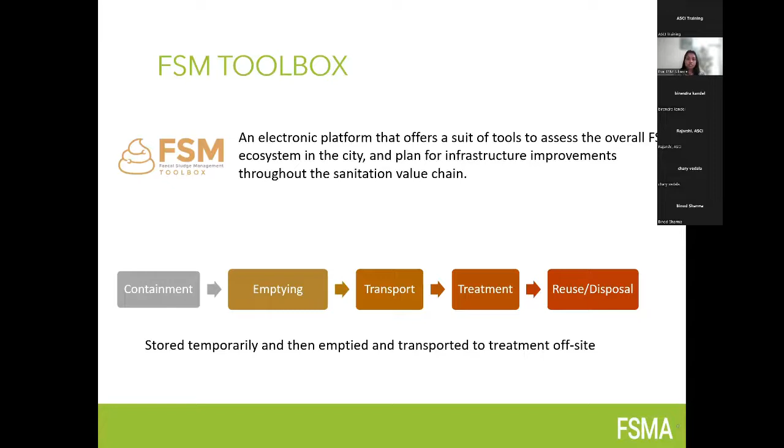So it has aspects that affect the whole of the sanitation value chain. I'm sure you already have heard a lot about the sanitation value chain, and we'll be hearing more about that today.

So here we have both the fecal sludge, where after the toilet the sludge is stored before it's transported and treated, whereas in the conventional method the wastewater and the sludge is directly transported. So that's the difference in the value chain.

You see both of them when you map out for a city or a locality. For example, the SFD, the sludge flow diagram, we'll see it later on. So I'm just highlighting what the value chain would look like.

Okay, so just showing you a few pictures to identify, because visual is better, what is fecal sludge and what is wastewater sludge. This is clearly fecal sludge because it's small, it's contained, it's not a larger area for a larger population. It's for a single household in this case.

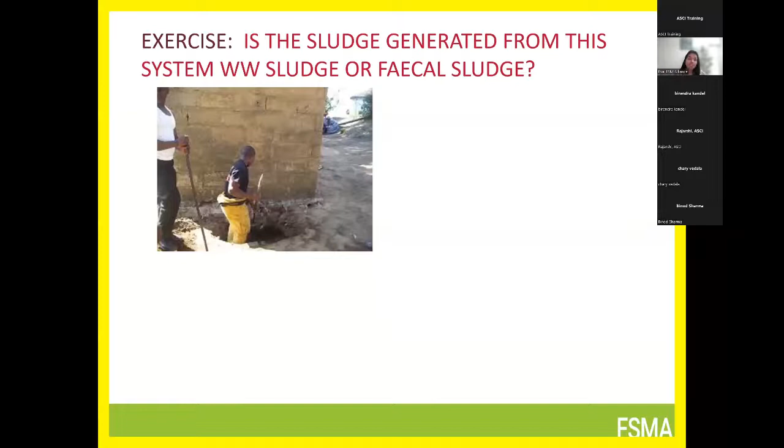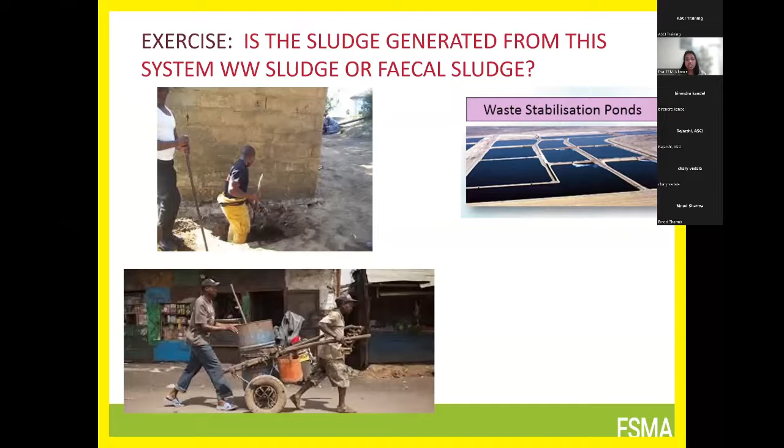Okay, so I'll just play a video that introduces this toolbox.

Citywide inclusive sanitation, CWIS, means that everybody benefits from adequate sanitation service delivery outcomes. Human waste is safely managed along the whole sanitation service chain. Effective resource recovery and reuse are considered. A diversity of technical solutions is embraced for adaptive, mixed and incremental approaches, and on-site and sewerage solutions are combined in either centralized or decentralized systems to better respond to the realities found in developing country cities.

Fecal sludge management, FSM, which is the collection, transport, and treatment of fecal sludge from pit latrines, septic tanks, or other on-site sanitation systems, is one essential component of citywide inclusive sanitation. The FSM Toolbox offers a suite of tools, guidelines, case studies, videos, and other resources to assist practitioners and policymakers to assess their performance on managing fecal sludge and formulate strategies for infrastructure improvements, institutional reforms, and financial mobilization for sustainable and effective FSM. The FSM Toolbox has two main product features.

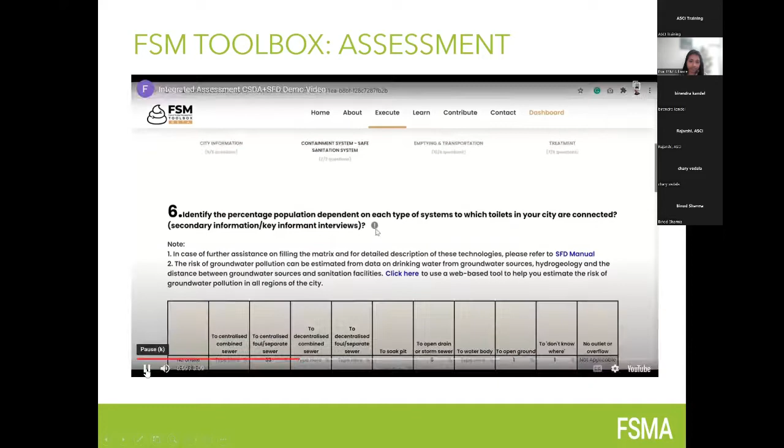I'm not sure about how to collect data for these indicators. Click on the information icon next to each question. This will give you a hint on how best to estimate or source the data. Once you finish entering all information for generating the SFD, the tool then takes you to the CSDA module.

While the shit flow diagram depicts the flows of fecal waste in the city, the service delivery assessment helps investigate the underlying policy, institutional, and regulatory environment to help explain the context within which the material flows of fecal waste occur.

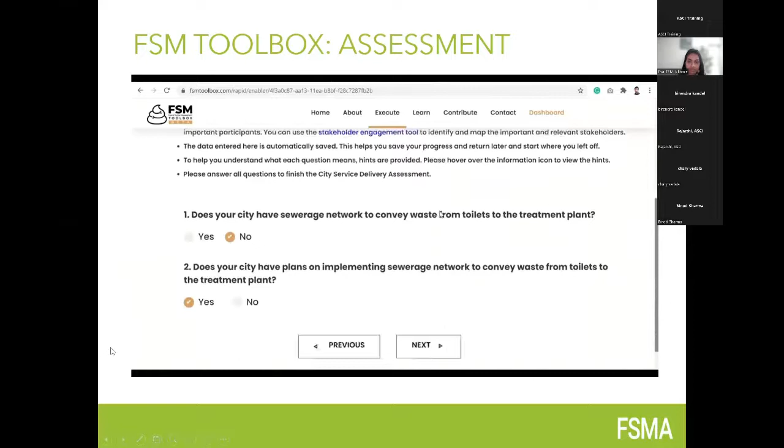Based on the city context, you can customize the tool to enter data for either sewer sanitation or non-sewer sanitation, or both. You can toggle between the tabs to enter data for sewer and non-sewer sanitation components.

This section focuses on assessing the quality of the overall ecosystem, including financial health, regulatory and institutional arrangements, and equity. You can also choose to edit the questions and options, customize and adapt them to your local conditions. Please refer to the guidelines provided for each question to understand the intent and purpose of the indicator. This will help you customize the question.

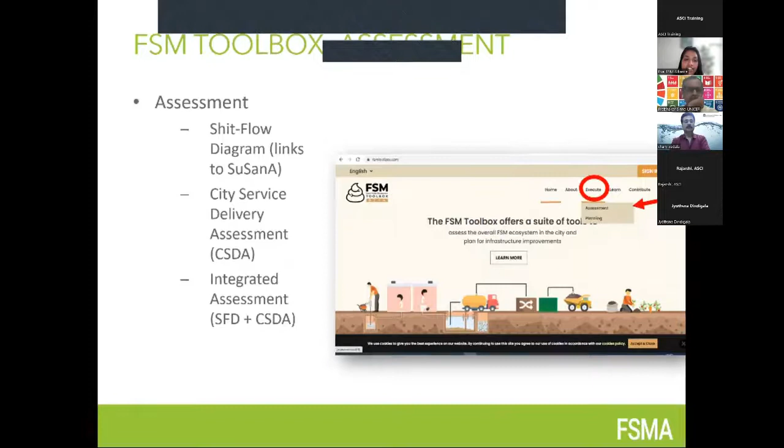Okay, thanks. So we have the shit flow diagram that is both embedded within the toolbox, and also you can directly go to the SuSanA link. Then there's the City Service Delivery Assessment, that is the CSDA, and then the integrated assessment, where you can do within the toolbox itself both SFD and CSDA together.

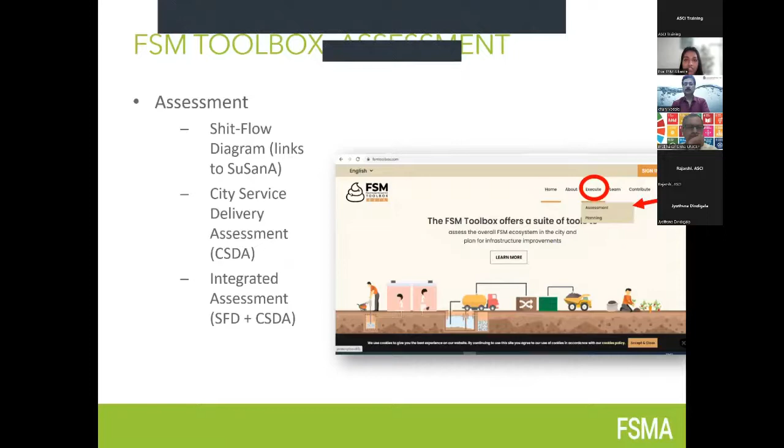So let's just see how you access it. When you go under the execute function, assessment, SFD redirects you to sfd.susana.org, which is the site for the SFD, the shit flow diagram.

And once you generate the shit flow diagram for a city, this is what you will be taken to. I'll just go through how to generate it, followed by understanding of how you read the SFD.

So what data you would need is the population, in terms of percentage of population, the different types of containment systems that are there, that is either on-site or off-site, and then how it is discharged along and to the next link in the value chain.

So you start with 100% of the fecal sludge that is generated, or the fecal waste generated in a given area, and how it is taken through the sanitation value chain. So that's how you do it.

And the second method you access it is, like I said, execute shit flow diagram directly within the FSM toolbox, or in the integrated assessment, where you do both the SFD and the CSDA.

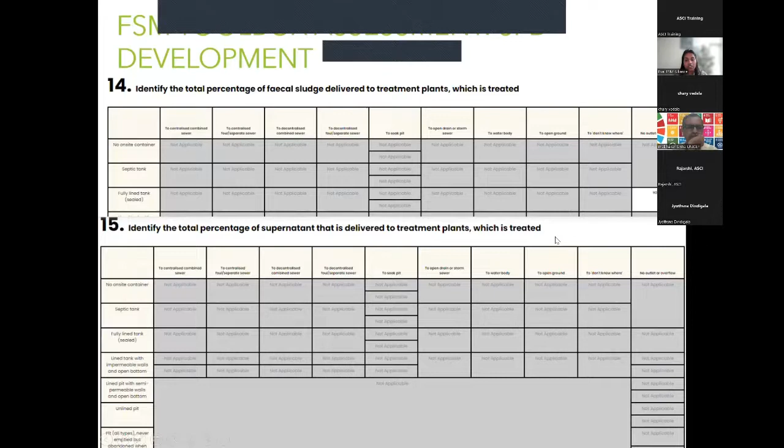And then the total percentage of supernatant, if it is delivered, is also treated under the wastewater part of the treatment plant. Here, they have identified for the Western Cape area the percentage of wastewater delivered to the treatment plant and treated, and what the total number is.

This is for the overall part of the treatment plant for that given area, not treatment plants specifically. And what percentage of the wastewater delivered to those treatment plants is treated. If there's any overflow, if it's overcapacity and some of it is not completely treated, that is captured here in terms of percentage.

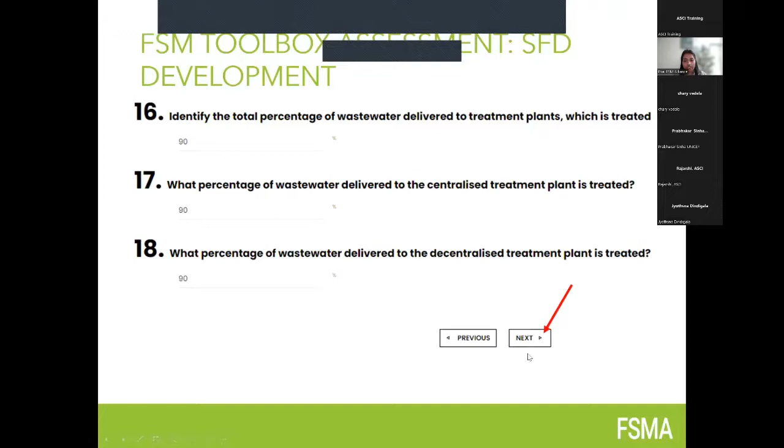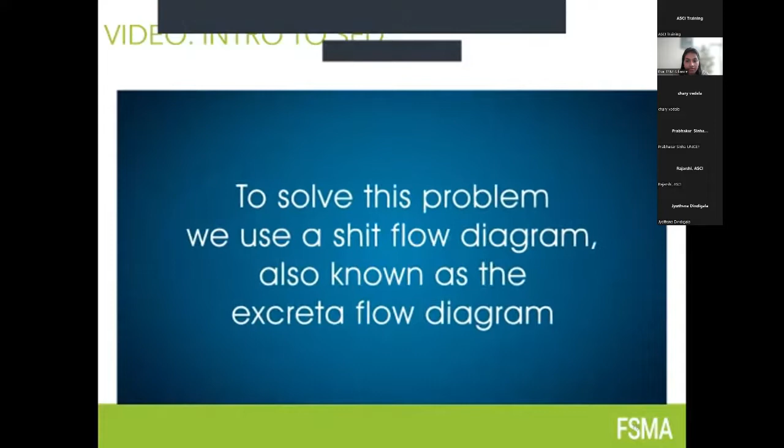How do we figure out where our shit goes? To solve this problem, we use a shit flow diagram, also known as the excreta flow diagram. The shit flow diagram, or SFD, is a powerful mapping tool for city planners, engineers, and consultants. It instantly communicates where the excreta of a city goes after it leaves its source. A single graphic at a glance tells how the excreta travels from the points of generation to the sites of disposal.

I think it has to do with recognizing where the problem is. If the problem is that people don't have enough latrines, then an approach focused on building latrines might solve it. But as we've seen, that tends not to be the case - the problem is after the toilet. What happens to the sludge? Is it contained? Is it emptied? Do the emptiers take it to the treatment plant? The shit flow diagram allows you to see what parts of this chain are dysfunctional, and therefore helps with designing interventions aimed at those particular breakdowns in the fecal sludge management chain.

The top row of the graphic is the sanitation service chain. Containment has three broad categories: off-site sanitation, on-site sanitation, and open defecation. Each category is represented by boxes of different width, representing the percentage of population dependent on that particular category. This sounds simple, right? The SFD graphic is read from left to right. The width of each arrow represents the percentage of population dependent on that particular system.

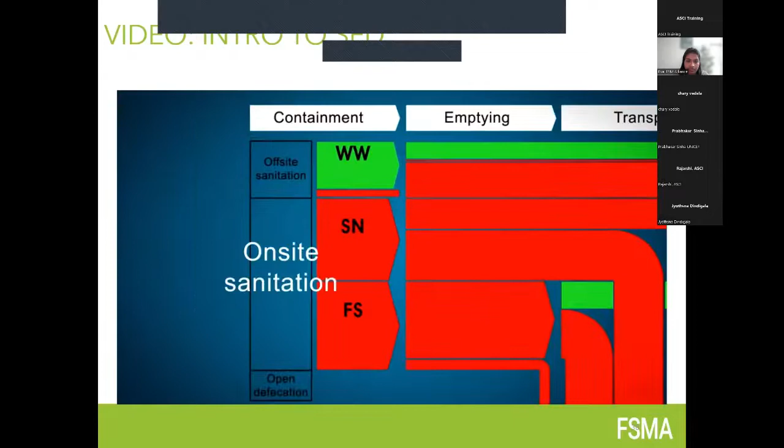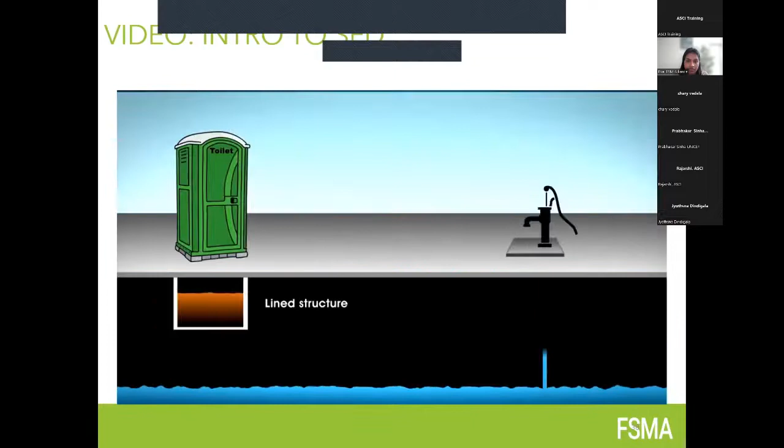The wastewater arrow originates from the off-site sanitation system, while the arrows representing fecal sludge and supernatant originate from the on-site sanitation system. The arrows are marked either in red or green depending on how the excreta is managed at each stage of the sanitation chain. Green means safe, whereas red means unsafe. If pathogen transmission to the general public is limited by the system, it is considered a contained system and shown as green. Otherwise, red is used. The green arrows tend to go towards the right, whereas the red arrows generally drop down.

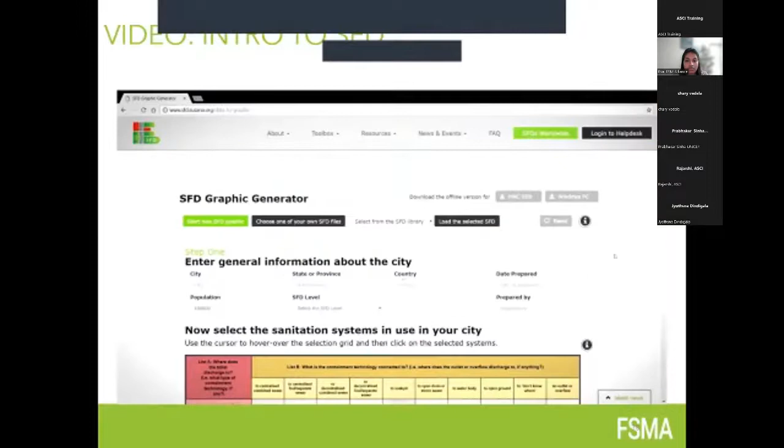Groundwater pollution is an important factor which determines whether a system is contained or not. Whether a particular system is polluting the groundwater is a site-specific question. For example, in Bikaner, an unlined pit would be considered a contained system, as the groundwater table is very low. To determine the risk of groundwater pollution, there is a separate tab available on the graphic generator where, by answering questions like groundwater table, type of soil, and extent of extraction of water, one would get to know whether the risk is significant or not.

Let's take the SFD of Cuttack as an example. Here, one can see that the wastewater generated by 19% of its population is contained as they are connected to a sewerage network, and hence that arrow is marked as green.

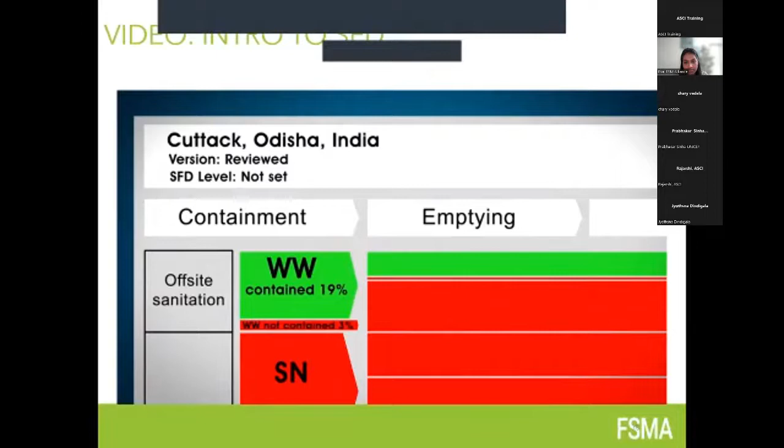The arrow in red is for the 3% of population's wastewater which is not contained, as it flows into open drains. Similarly, both the arrows of supernatant and fecal sludge are red, as septic tanks connected to open drains are considered a not contained system. There is also a red arrow for the 11% of population that defecates in the open, which is also considered not contained.

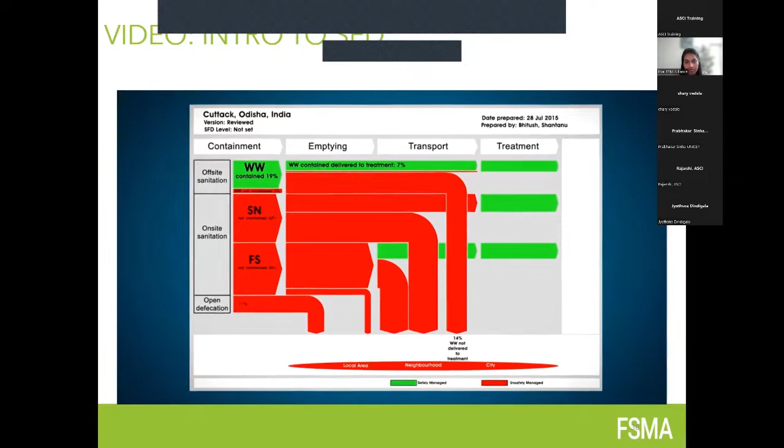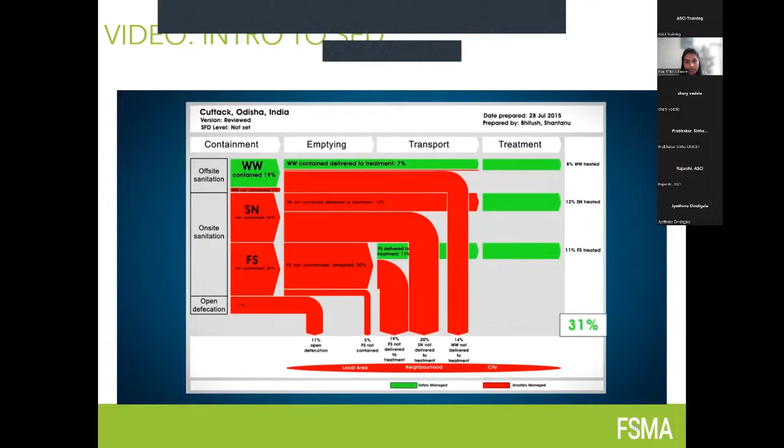The green arrows under the emptying and transportation segments indicate that wastewater from 7% of population is safely transported and delivered to treatment plants, but wastewater from 14% of population is not treated and drops down as a red arrow. The arrows for supernatant and fecal sludge follow a similar pattern—if delivered to treatment plants, the arrow turns green, otherwise it drops down as red. So in total, the excreta of 31% of population is safely managed, while the excreta of 69% of population is not.

The shit flow diagram has two components: one is the graphic, and the other is the report. The graphic should be read with the report because the report has the quality of service being delivered across the sanitation chain. If you want to understand the excreta management of the city, the graphic should be read with the report. The report also gives us the source of data, the stakeholders involved, and the assumptions made to create the graphic. So how do we make this shit flow diagram?

The process of developing an SFD starts by getting a broad understanding of the city and assessing the sanitation scenario in that location. This is done through collection of required data on population and sanitation systems in the city from secondary data sources. The secondary data includes literature review of published, unpublished, and government documents pertaining to sanitation, such as census reports, detailed project reports, city sanitation plans, master plans, and many more.

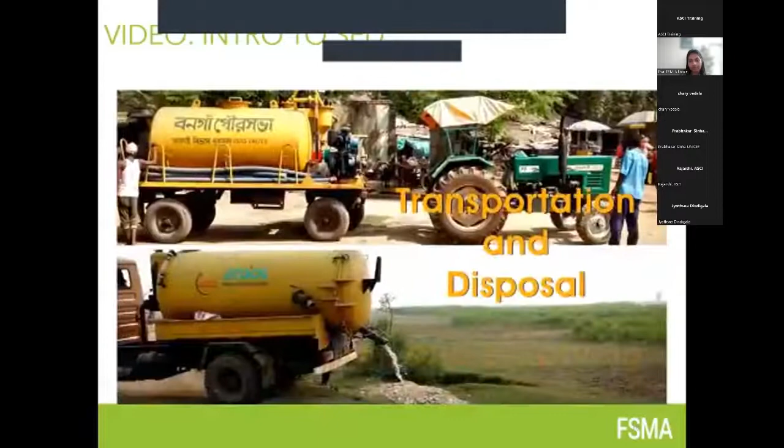So what should be the next step? To identify the stakeholders from whom the required data can be collected. A well-defined strategy should be developed to engage with the identified stakeholders. This strategy may include field observations of the prevalent systems and services, feedback from informants, measurement of the efficiency of treatment systems, and focus group discussions with the stakeholders involved.

This quantitative data is then fed into the SFD graphic generator. The SFD graphic generator produces an SFD graphic which depicts the management of excreta at each of the 4 stages of the service delivery chain.

I think this has helped a lot when we were trained on this particular tool by Center for Science and Environment. We learned how, just by inputting data, this shit flow diagram can be generated. This particular infographic has been very effective, and I think this should continue.

So how to use an SFD graphic generator? Let us go through the official website www.sfd.susana.org to understand how to generate an SFD using the SFD tool. Click on the toolbox option and select SFD graphic generator. Now click on Start New SFD Graphic.

Let us go one step at a time. Step 1: Enter the general information about the city, such as the name of the city, state and country. Put in the date on which the graphic is prepared. Then fill in the population, the type of SFD level, and the name of the person who prepared the SFD. Now select all possible sanitation systems present in the city, and mark it in the selection grid given below.

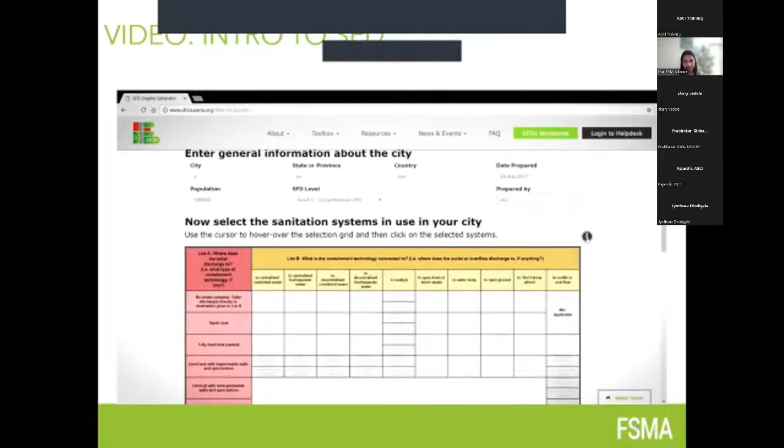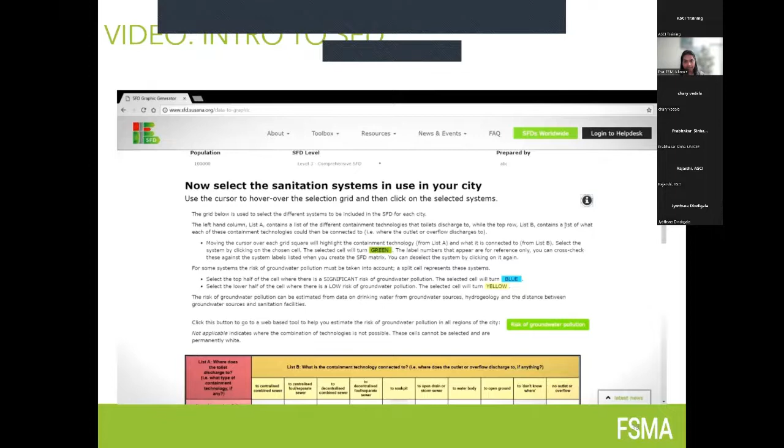To understand the parameters and details about the selection grid, click on the alphabet I in the right corner. Clicking on I opens up the instructions on how to use the selection grid. To answer the questions pertaining to groundwater pollution, one needs to click on the button called Risk of Groundwater Pollution. The left column of the selection grid describes all types of containment systems, and the consecutive columns describe what these containment systems are connected to.

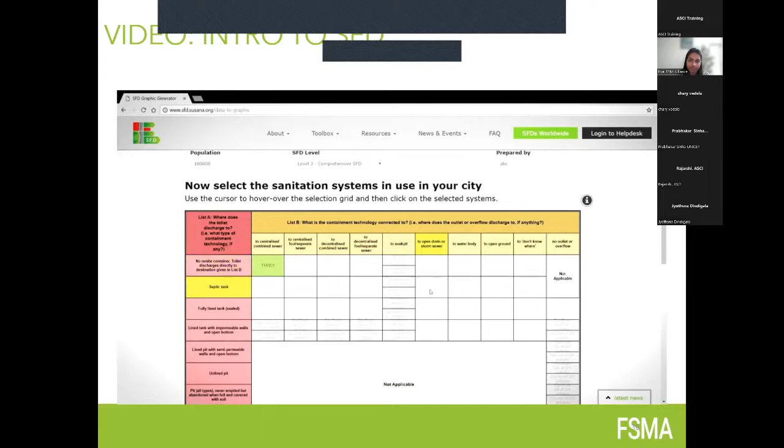Let us assume in a city X, 3 types of containment systems are present: a toilet with no on-site containment, which is connected to a centralized combined sewer; a septic tank which is connected to an open drain; and a lined pit with semi-permeable walls with an open bottom and no outlet.

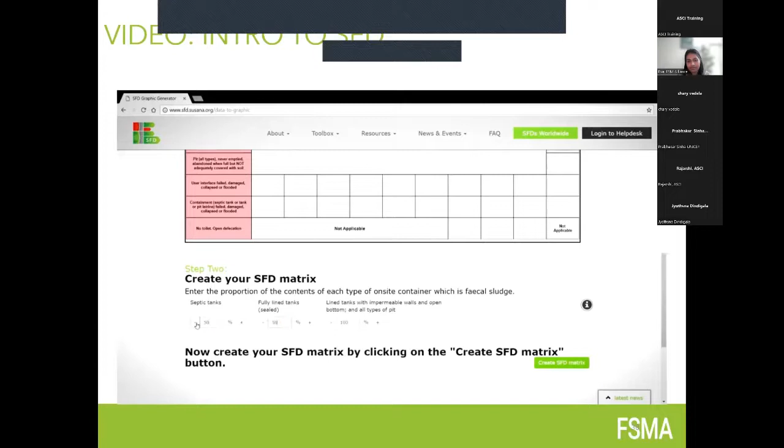To create an SFD matrix, enter the proportion of fecal sludge one can find inside each type of containment system. For further explanation on this, click on I present on the rightmost corner. Next, click on Create SFD Matrix. An SFD matrix appears.

The leftmost column consists of the selected containment systems. Each containment system is labeled by a unique variable. One should refer to the SFD glossary to understand the systems through the variables in depth. The next column indicates the proportion of population who use each of the containment systems. The consecutive columns indicate questions on the proportion of wastewater, fecal sludge, and supernatant along the service delivery chain.

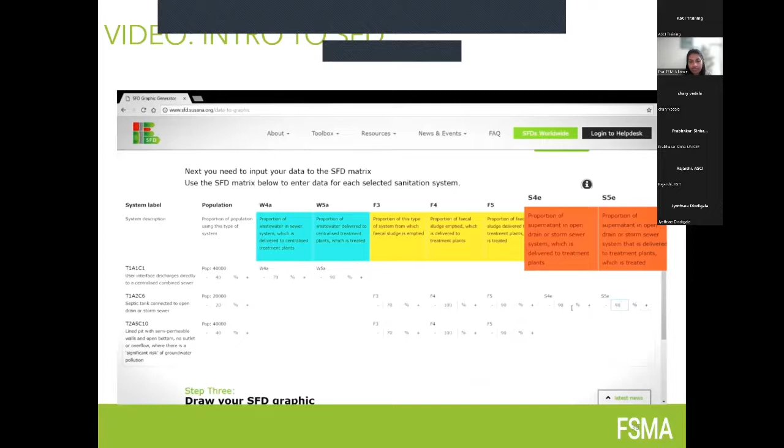Actually it is an interesting tool, but data intensive also. We didn't have so much data about the containments because, as you know, the census does not have so much detailed information on containment. It just says septic tank, pit latrine, and open defecation, that's it. So to have intensive data, we had done a baseline study, which was sample based. From that we could pull out different types of containments, filter them out, and match them to what criteria the SFD tool demands.

A city should make a shit flow diagram because it's a much more accurate representation of the problem that untreated fecal sludge causes for the environment and for health. If you look at a place like Dhaka, Bangladesh, using the traditional measure of access to sanitation, more than 98% of people have that access. But if you look at where the sludge goes, it turns out that more than 90% is not treated. That's why a representation like the shit flow diagram is more accurate.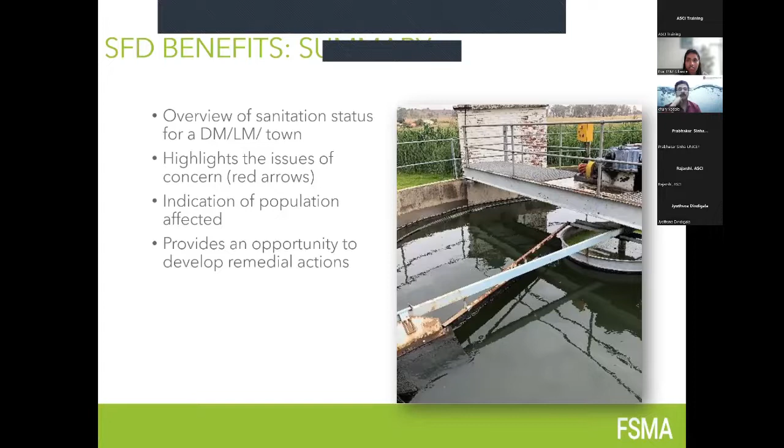So I think this was captured, I'm not going to repeat this again. It gives a detailed overview, so it's very helpful for decision makers and stakeholders to understand at a snapshot what is needed in that particular town or municipality, and it highlights the areas which need attention and indicates the percentage of population affected, and then actions could be taken after. So I'm hoping that after this you're able to read the SFD graphic. I will let this be an exercise, but later on you can go through it.

Okay, so I'm just going to briefly take any questions. There are just a couple of questions. Thank you very much for introducing the first tool. Friends,

the excreta flow diagram or SFD, shit flow diagram, is a tool to understand in a very graphical way. It's a very powerful advocacy tool to communicate to your stakeholders the extent of safe and unsafe practices prevailing in your town. At a glance, you would get what percentage of households are on the safe side and what percentage are on the unsafe side.

So even there are few questions. Question number one: in certain cities there are some communities, like even in Mumbai, quite a few households are dependent on shared sanitation facilities, that is public toilets or community toilets. If you go to Dharavi, there are a lot of community toilets, a lot of slums have a lot of community toilets, and they're ready to migrate to individual household toilets. How does that get reflected here? Is it acceptable? Will it be treated as green or will it be treated as red?

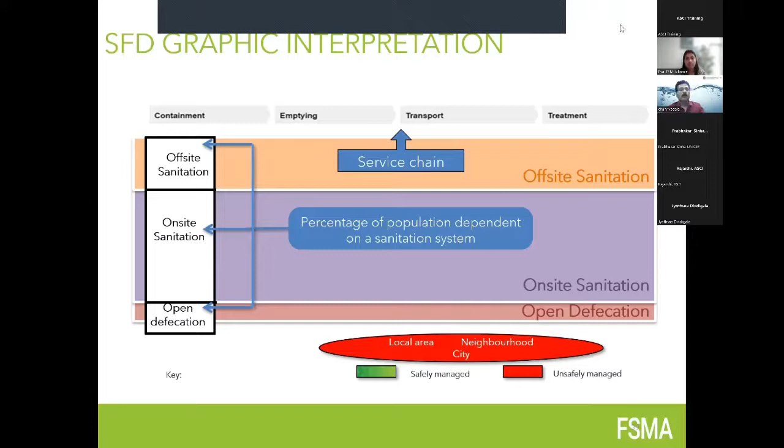So there is one more question, related to what our friend from Africa asked - what is safe and what is unsafe? If you have a septic tank and the outlet is connected to a drain, not connected to a soak pit - that's a clear case of an on-site system. How do you view this from an SFD point of view? Is it an unsafe system? If the septic tank is present, that means it's contained.

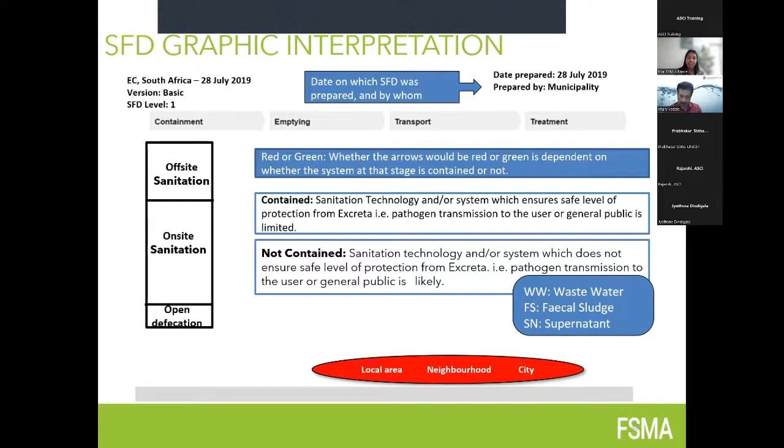But if it's connected to an open drain, then emptying and transport might be classified red. It depends - some areas connect the open drain at a later stage to a treatment plant, so whatever volume is treated from that open water connected to the treatment plant is added as a percentage treated. But generally, if it goes from containment to an open drain or nala, it would be red - unsafely managed.

It is called safely managed, or in this case unsafely managed. I think that answers some questions. There's one more issue - one of our friends asked: on-site systems conventionally deal with black water, human waste and anal washings. Now much of the gray water, which also contains some pathogens and gets cross-contaminated with overflow of septic tanks, is not captured in the containment system. So is SFD restricted to only black water and not looking at gray water? That's correct - it's a shit flow diagram, so technically it's black water, not gray water, that is looked at here.

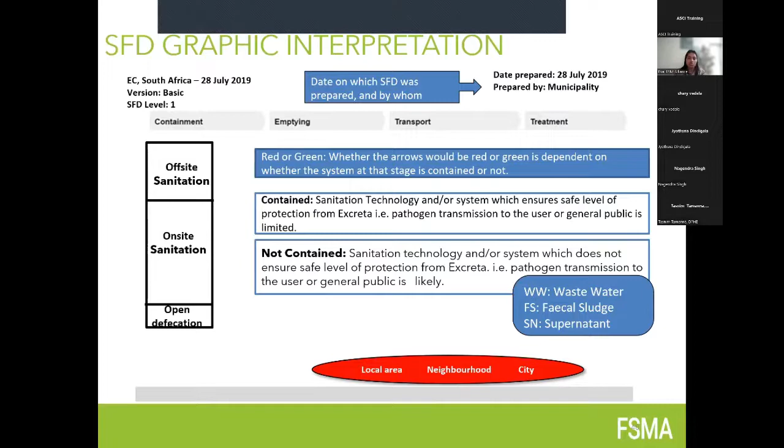Then from a chunk it goes into smaller and smaller pieces, like here for example. This is a supernatant that is not contained, and this is the fecal sludge. If part of the fecal sludge is treated, great. If the rest is let into a nala untreated, but some amount from the open drain is captured back into a water treatment system, then that percentage is called safely managed.

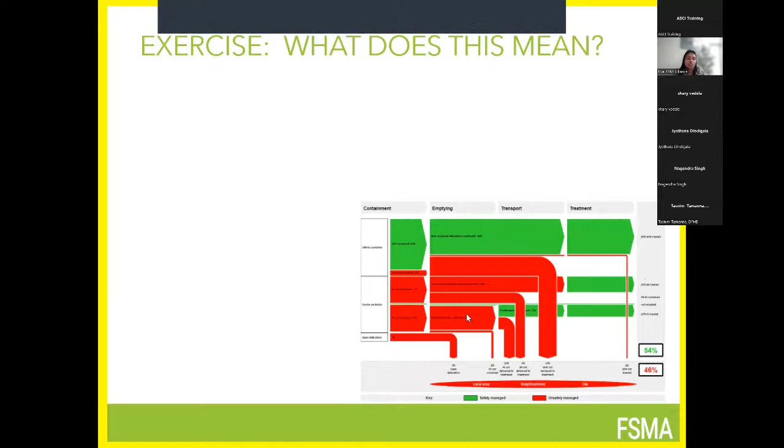So then we come to the second tool, the city service delivery assessment, or CSDA. Within the tool it falls under assessment, and you can find it both as a single component or together with the SFD. It asks why, what are the conditions in a city that led to its sanitation services being like that. It includes infrastructure, policies, legislations, laws, etc., all captured under the CSDA assessment.

Here it looks at both sewered sanitation and non-sewered sanitation. It's divided into three kinds of environment: the enabling environment, the developing environment, and the sustaining environment — things that enable the sanitation system to function, things that allow sanitation solutions to exist and be present, and how the system continues to function within the given area. Under each, there are three more pillars.

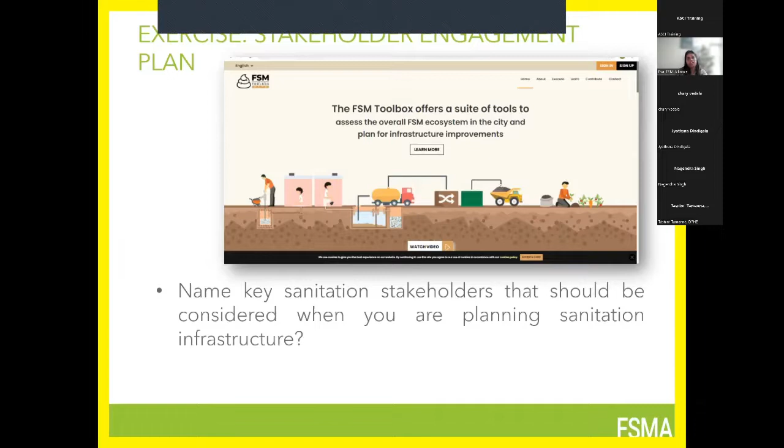Again, I'll leave the questions for your exercise later for you to do at your own time. Then we come to infrastructure planning under the planning tool set. This has two components: the city level infrastructure planning and the regional level infrastructure planning.

The Citywide Planning Tool is a powerful decision support tool designed to help you collect and analyze geospatial data to plan for infrastructure investments along the FSM value chain.

You may choose to view the questionnaire before starting the process of filling out the data by clicking on the View Questionnaire button. You may refer to this demo video at any point for guidance on how the tool works.

Once you get started, the tool prompts you to select the type of infrastructure improvements you want to undertake by clicking on the tab Planning Tools. The tool is designed to help you estimate the infrastructure gap and identify a menu of suitable responses to aspects such as household and community.

I'm just going to pause it here because it is available later, and I think I'll rather do the talking and continue so we can have more meaningful dialogue later.

This infrastructure planning helps identify and plan the intervention along the value chain that is necessary for fecal sludge management for the given area.

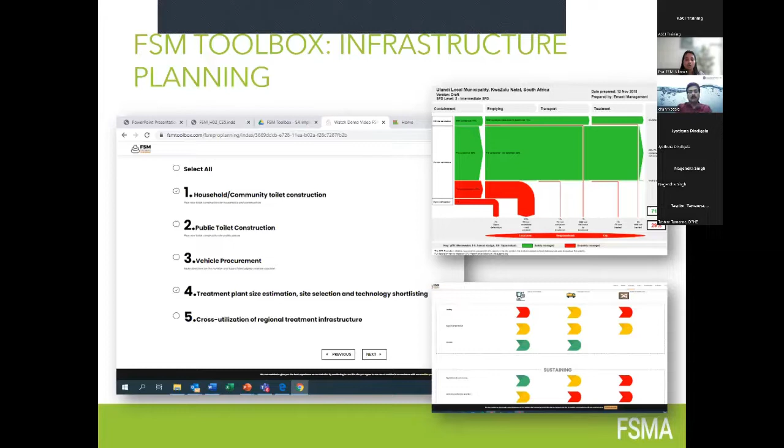The CSDA assessment also states more funding for constructing toilets and treatment systems. So that's what you have selected here: household community toilet construction and treatment plant size estimation and site selection and technology shortlisting for probable intervention in that site as well.

So what are the steps involved in developing a plan? You will first prepare the questionnaire after identifying the key areas of intervention, and then you start with the data collection, data analysis, and reporting. In the meanwhile, we also do the sample size determination and training the enumerators internally. But outside that, it's mostly questionnaire, data collection, data analysis, reporting.

The data collection is done via a mobile application, which is tracked online in real time. You can also review data from the enumerators on the mobile application in real time.

Graphically, as the engineer or planner starts his planning questionnaire, the enumerator receives a notification, agrees, and then goes and collects the survey, which is fed directly to the engineer or planner. They can then see the number of surveys completed out of the total number, and in which areas.

Like the 2 that we selected in the household, 6 were completed out of the 10, and similarly for the community toilets. You also see a graphical pie chart.

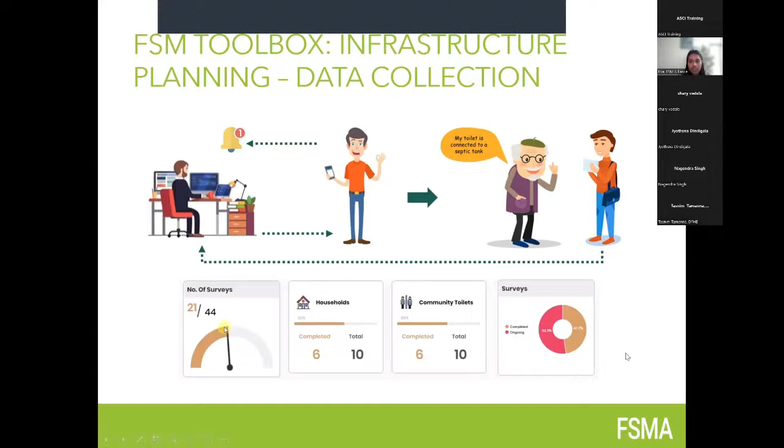This is a view of how to add a new enumerator within the system. You just need their name, email ID, and then you can see the status on the right.

So this is how the app would look, and this is how the survey would look. It's built for a smartphone, of course.

It doesn't need an internet connection while collecting the survey, so even in remote areas, the surveys could be collected. Once the enumerator or data collector is back within an internet connection area, the data will be uploaded online to the server.

So that's the tools. There are a number of assumptions that take place for the planning. For toilets, for example, the number of seats required for X number of population, X number of men.

The number of seats both for men and women in community toilets, and then number of seats for men and women also for public toilets - those are the numbers that need to be put in based on the regional guidelines or rules set up by the code within that region, area, or country specifically. That is one of the assumptions for the public toilet or household community toilet.

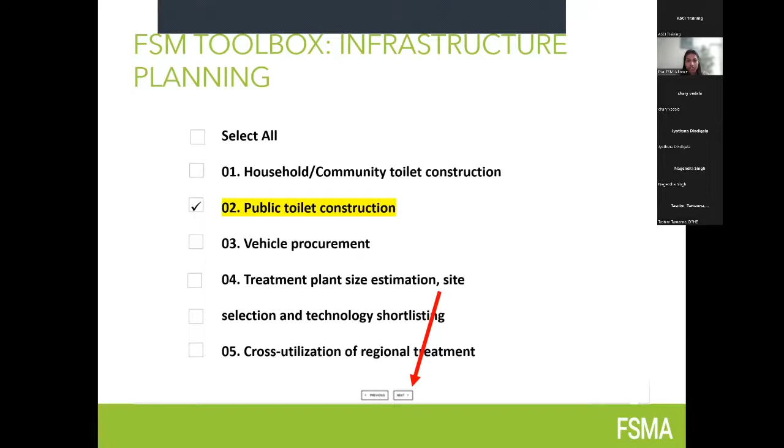Once the questionnaire is selected and the survey is launched, the data is collected, which includes the current GPS location of the current public toilets, and also location of any empty areas where a public toilet could be installed. Then the next question covers average floating population in the public area, the male-female ratio, the available public toilets, and the infrastructure details of the available public toilets.

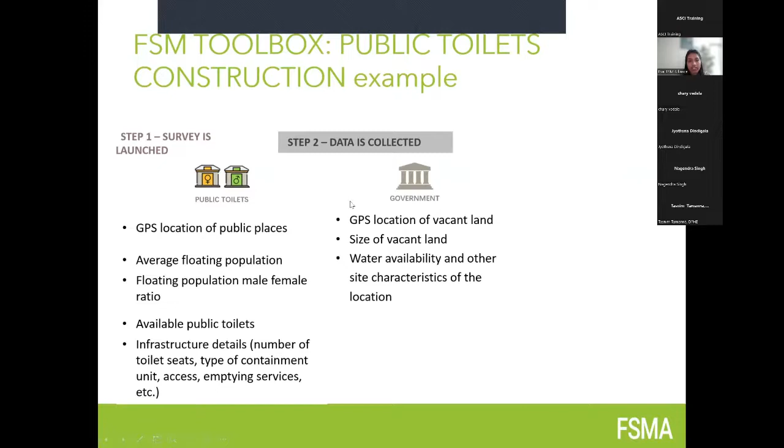So that includes the number of toilet seats, containment unit, access, emptying service, etc. Then, as I mentioned, the GPS location of vacant land is also collected, along with the size of the vacant land, water availability, and other characteristics of the site, so that it could be planned for planning purposes.

Then once these are fed in, the data is processed. The algorithm uses, for the public area, the total male to female ratio, and from the benchmark, what is the required male to female toilets for that floating population. Then the difference is used to assess if the available toilets are sufficient or if there need to be more new public toilets built for that area.

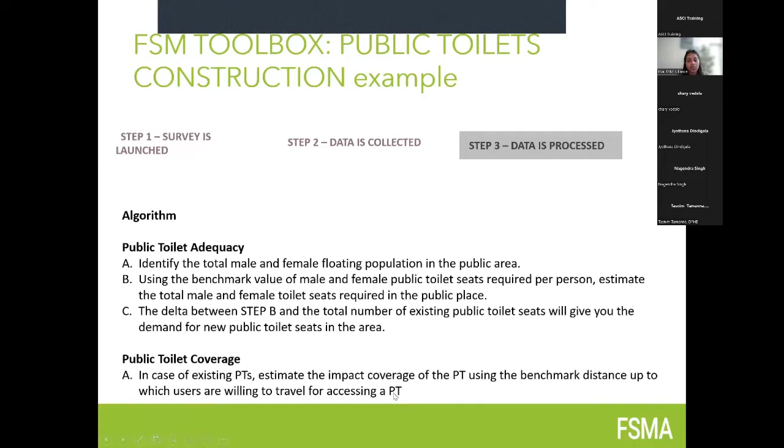So the distance that a user is willing to travel is also taken into account when doing the public toilet coverage.

So then the algorithm for construction of the new public toilet determines if there's a need for new construction, or if the current public toilet system is sufficient. For the vacant land, it determines the number of toilet systems that could be built, and the distance between where the population is concentrated and the willingness to travel is assessed to identify the exact vacant land that will be used. Once that is identified, according to the male to female ratio, the seats are allocated to meet the demand.

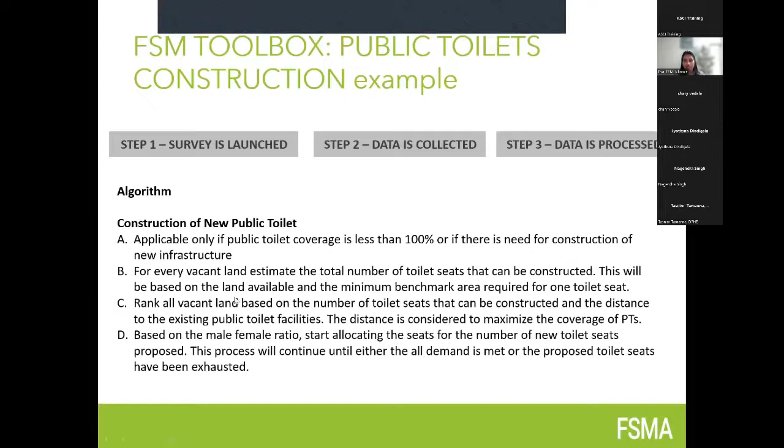So this is an example. For a floating population of 5,000, 3,000 are women that need public toilets, and 2,000 are men.

The number of public toilet seats available is 50, which, according to the assumption for 2,000 men, is sufficient. For the women, the available female public toilet seats is also 50, but according to the ratio required for the number of female floating population, there need to be 25 additional toilet seats constructed.

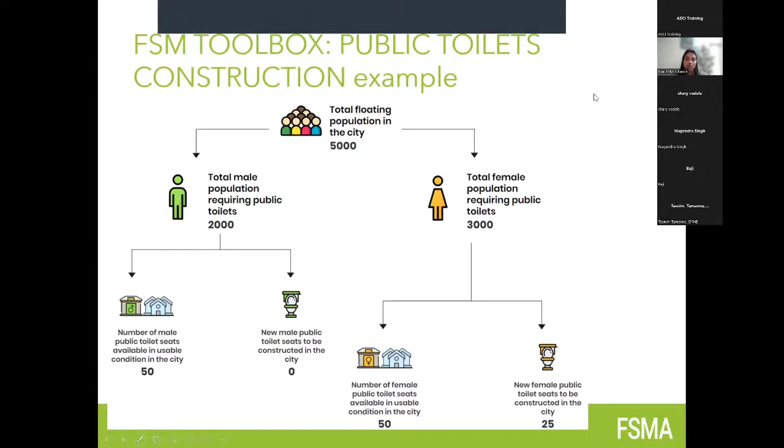So this is basically how the data you collect from the survey is used.

And this is a visualization of the area. You see for the public space here the total floating population, available toilet seats versus the required, so proposed new ones for both men and women.

And then you come to where the available ones are currently located, and you see where the empty slots are where a new one could be put up.

And then based on the willingness to travel, you choose the sites and the number of seats if it's sufficient. And if it's still not sufficient, based on the gap that is identified, you can build another one depending on the available funding.

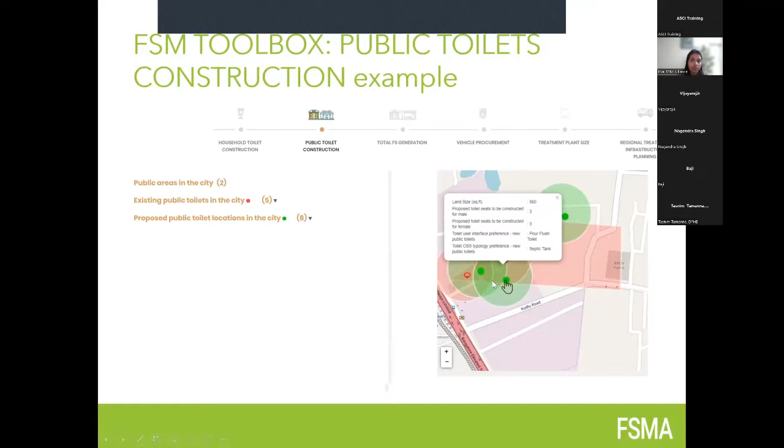Okay, so then for the household toilet construction, similarly, after the survey is launched, we get the GPS location, population of the household, access to the community toilets or the household facilities.

Availability, functionality as in the type of toilet system and the current toilet use practices, and then the on-site sanitation service system if present, land availability, preference, and water availability for the household.

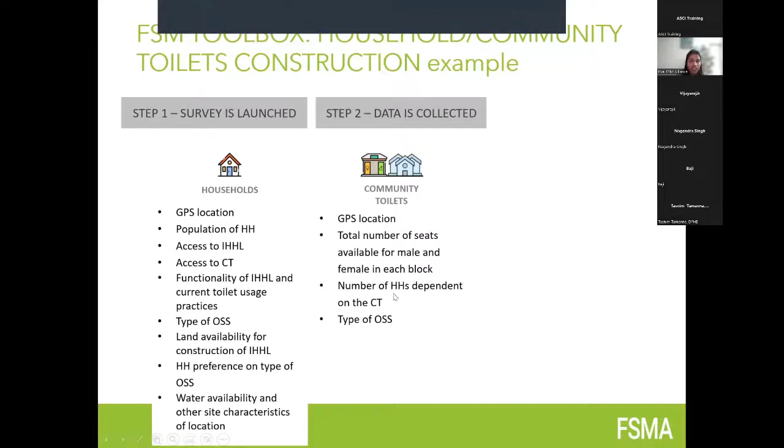And also for the community toilets, GPS location, number of seats, the number of households that are dependent, and the on-site sanitation system. The vacant land is also captured for the community toilet, including GPS, size, water availability, etc.

So similar to the public toilets, just a larger region, you get the overall view for the household community toilet construction. Then again, based on the preferences for the household, the toilet type system is installed, and the on-site treatment systems are based on what is currently possible from the accessibility, the type of geographical topography, etc. So that's recommended through this survey infrastructure planning module.

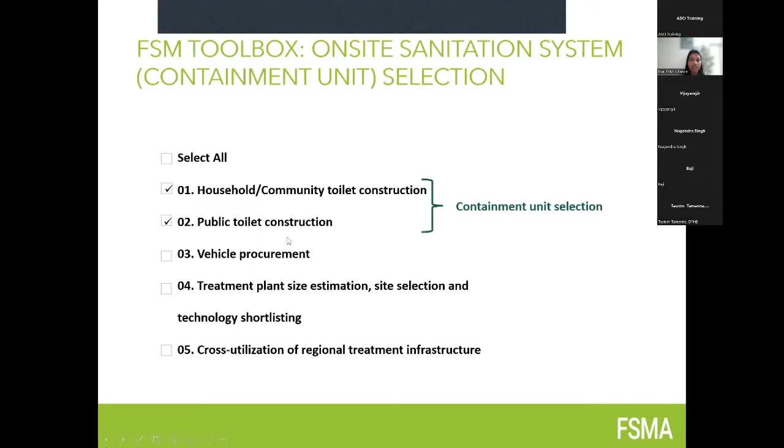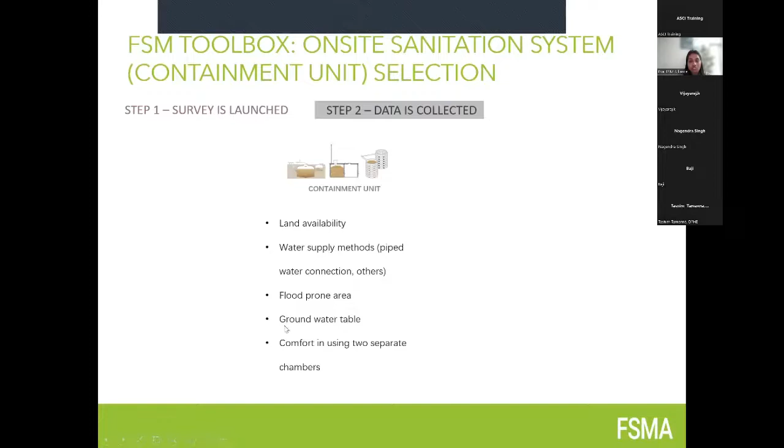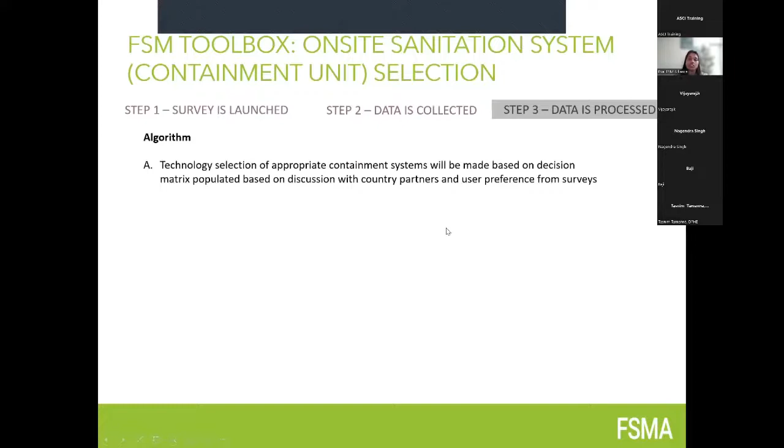So you can also select both household and public, and then you get the combined survey for containment unit selection. For the containment unit, you come with the type, land availability, flood prone area, water supply, groundwater, comfort in using the two different separate chambers, etc., by the local users. Then the data is processed based on the decision matrix, which was based on the discussion with the partners.

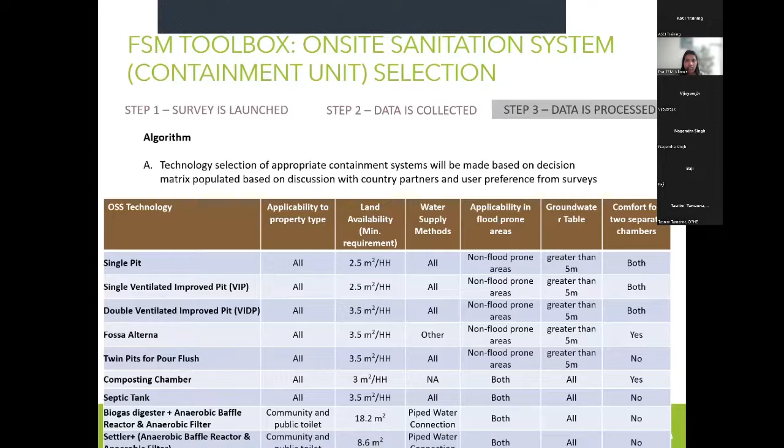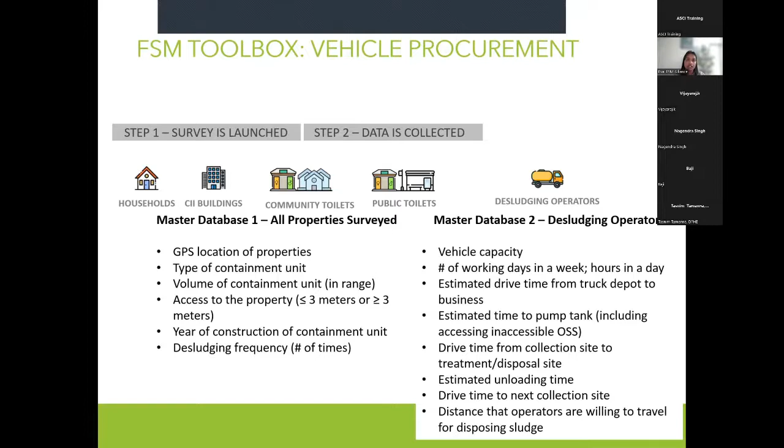It depends, from the user side, on the location, type, volume, and number and frequency in the year. From the desludging operator side, it's the capacity, willingness to travel to a treatment system, number of working days, and other points. So both sides are evaluated, the data is collected, and then some benchmark assumptions for the requirements from the city or municipality for prescribed desludging, population growth rate - all of that is also included within the algorithm.

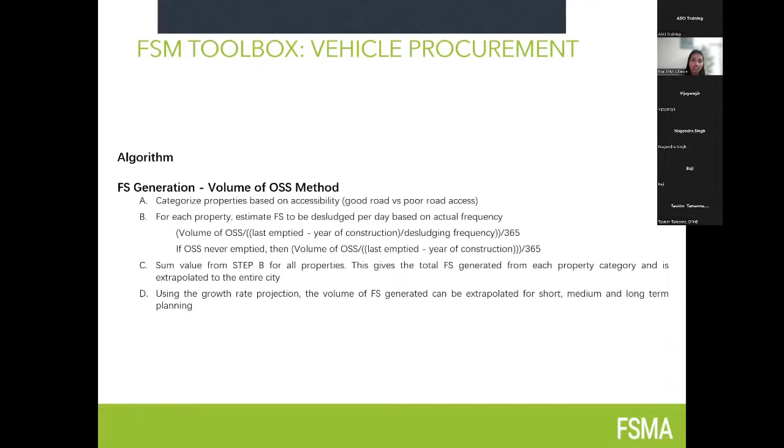Then it arrives at the volume that needs to be treated for a particular region, depending on the type of desludging interval and the capacity that region has in terms of treatment plants, and the operators' willingness to travel and the number of operators. So that is all fed in. And if there are not enough operators, then we go into the purchase of new vehicles - that's also a step we get from the output of this planning process.

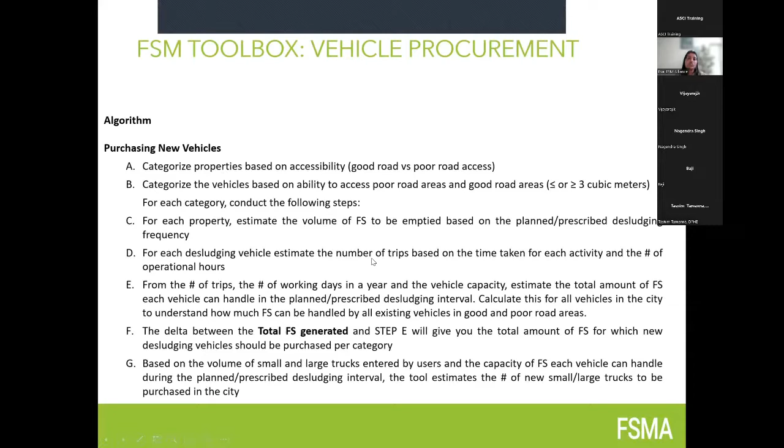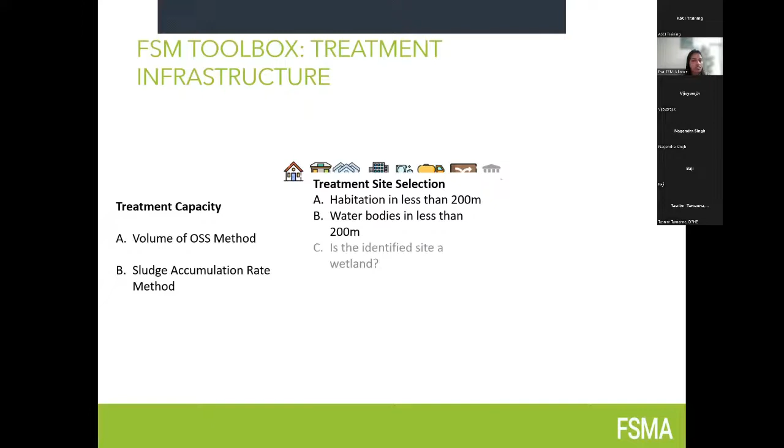So for the treatment infrastructure, based on the current treatment capacity and the sludge accumulation rate method, both of them, we start with checking if the current ones are sufficient. If not, if a new treatment selection system has to be built, there's a selection of the site based on all of these variables, and then selection of the technology based on all of these variables.

The algorithm gives the number for the capacity, the vehicle procurement that is needed to transport the said capacity from the site to the treatment plant. Then the quantification methods are all calculated based on the assumptions that you have input, and also the growth of the city that is estimated in the assumptions. So that way it arrives at a treatment capacity system that is needed for the city or region.

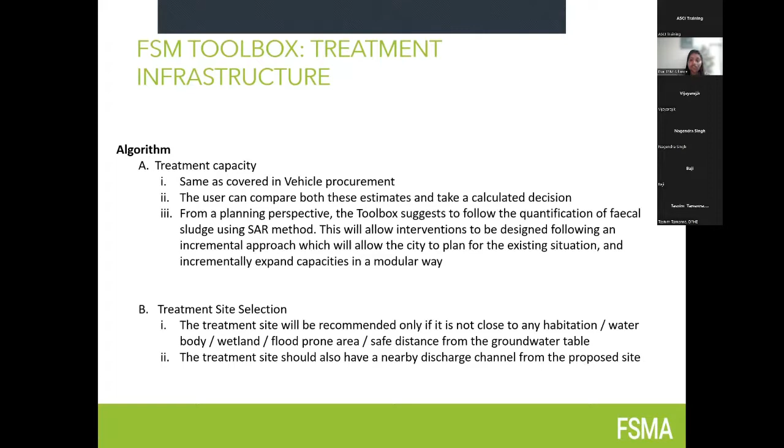And then treatment site selection, based also again from the questionnaire, we arrive at the optimum site that is not close to any habitation or water body, and then a discharge channel that also follows the regulations set by the government of that region.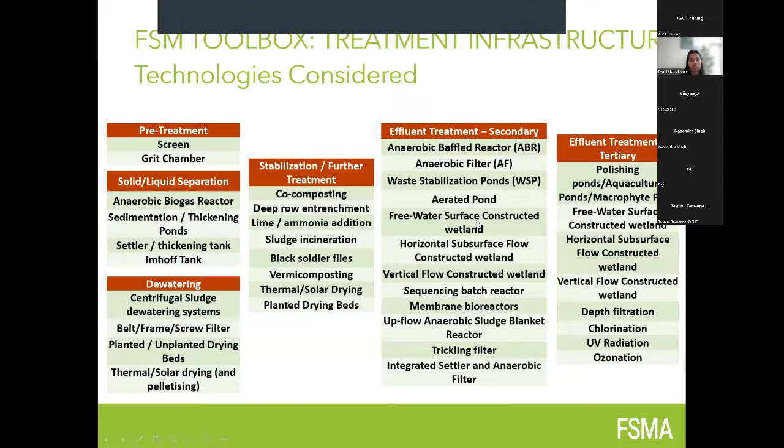So these are the different infrastructure technologies that are considered within the city planning tool, and suggested based on the survey that is done. Suggestions are given out, and also includes geographical mapping of the region, a city, and what steps need to be taken.

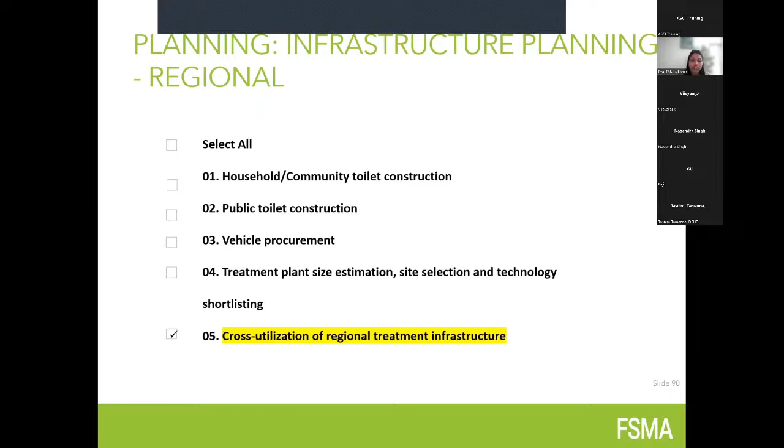Then we come to the regional planning, which is also similar to the city planning, just it includes 2 or 3 or more cities that are in a cluster in a region that can cross-utilize each other's treatment options. So it's not just dependent on a city or municipality's own treatment options, but also the close-by ones, based on which is the nearest one that a desludging operator could go to that has the capacity to take the fecal sludge. So again, you start with entering all the data.

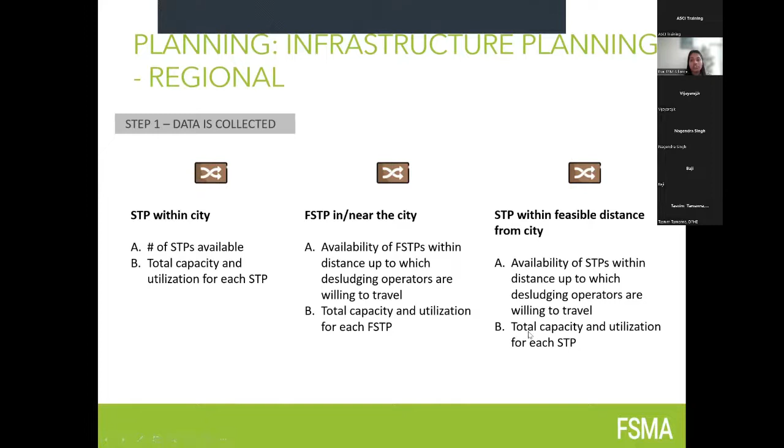The data is collected - one is the STP within the city. STPs, that is FSTP, is a fecal sludge treatment plant that is in or near the city, and then one that is feasible from the city to travel to. So this data is then used for the calculation purpose.

Depending on the treatment type, sometimes it's co-treatment, and then the amount that could go into the treatment systems differs depending on treatment technology. So all of that is also taken into consideration here.

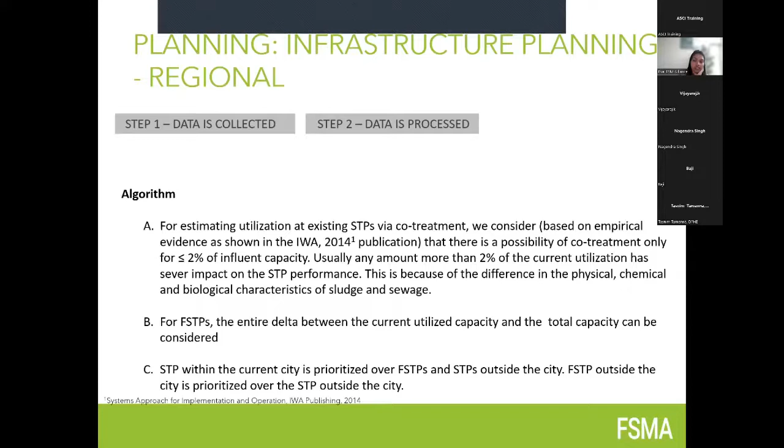And then if there's a demand difference, it could be utilized from the existing ones, and if not, new ones are needed, or can the ones in the next closest available city be used, if it is close enough that the operator could travel to. So that kind of calculation is done at this end.

So here, for example, we have the 33 cities, and then the data from different cities are collated. Of course, enumerators, engineers, and planners from those regions are invited to take part in this collective data collection.

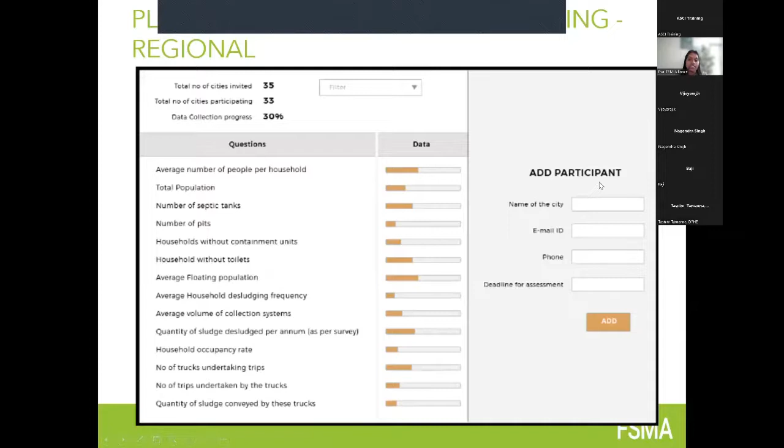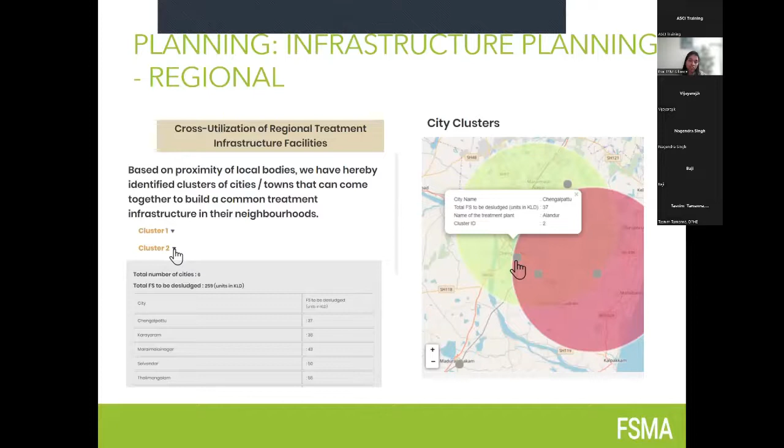Some of the questionnaires for each city need to be done separately, and if that's all done, or if they have the data even without going through the toolbox, if they have the data separately outside, they could input it into the regional planning, and we can arrive at this data.

So I'll stop here for questions. And if not, I'll continue. I know it's over time.

Just have the business model selection. This under the planning—I'll not play the video now, you can go through it later. The business model tool.

There are certain business models developed by different partners that are then collated by us and put here. Based on the partner's, or user's, level of interest and which part of the sanitation value chain is relevant, we can choose from the available business models.

So this is how the business model tool looks. You can look into each business model and check feasibility based on your data. So you input feasibility assessment data and then select what is possible. You can shortlist it by which part of the value chain you can utilize.

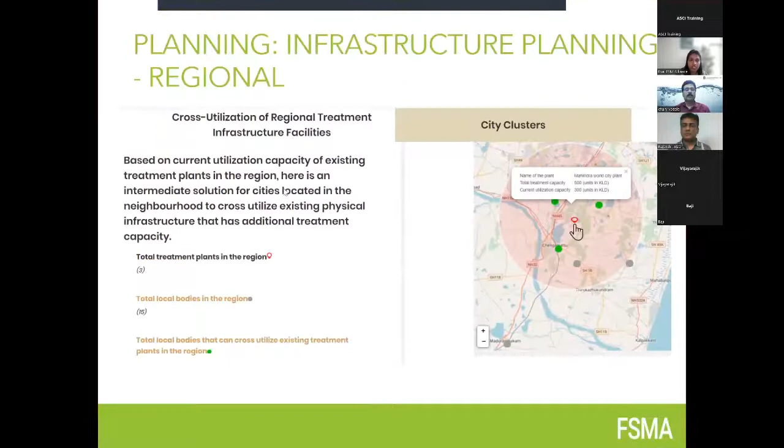So one question is, how much data is needed for vehicle procurement? There's a module on vehicle procurement. What sort of data do you need for estimating the vehicle procurement? The number of questions needed is detailed. One sec here.

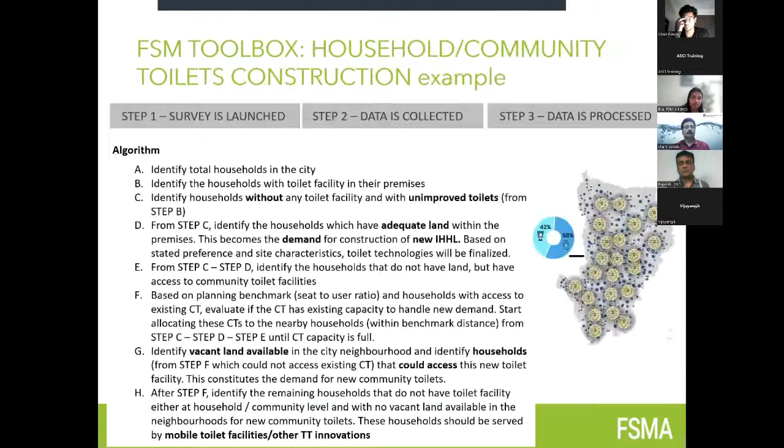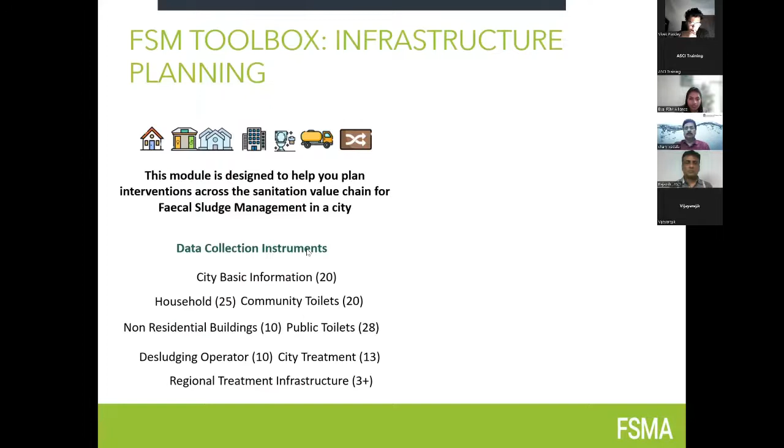That was a lot of questions. So for the vehicle procurement, once you select those, the questions would be: desludging operators, 10; city treatment related questions, 13. So it's 23 questions. If you want to view these questions, it's freely available. You can go to the FSM Toolbox website and go through them individually and see if you have the answers to those questions.

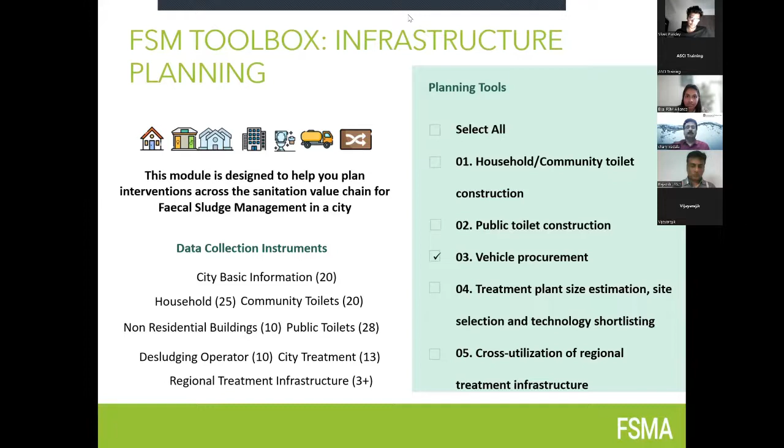Yeah, so Dr. Eva, I just wanted to add, there are questions embedded that would help us identify how many vehicles are required of different sizes. But what would be interesting to know, broadly, what are the decision variables you take? Is it based on the number of septic tanks, number of treatment plants, what is the distance between the treatment plant and the demand generation point? Are these the criteria to decide the number of vehicles required, broadly?

Yes, that's correct. So it's based on whether the current existing vehicles are sufficient to cater to the population, based on the size of the vehicles, the capacity of the vehicle to hold, and the number of trips they're willing to do, the days they work. So based on how the operator functions and the current number of services they are willing to do, and if it is meeting the city or municipality's demand per day, also cross-referencing it with the region the operator is willing to cover, and whether there's a treatment plant within a close area. So all of these are the criteria covered under the desludging operators, to determine if more desludging operators are needed or not.